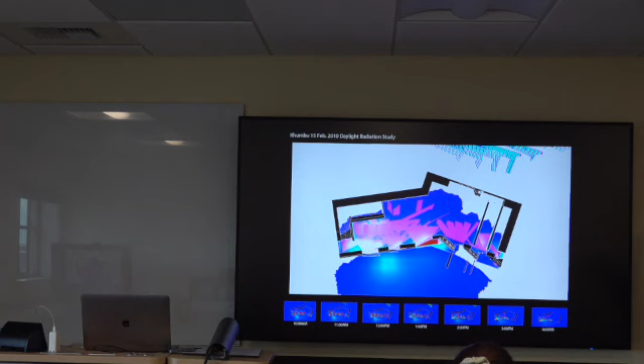So we modeled the building, and these are radiation studies. Especially at 12,500 feet, the air is incredibly thin and there's a lot of sun in the winter. We were able to orient and shape the volume of the building to maximize heat gain so it could be entirely passively heated, without having to burn yak dung in there at all.

It was kind of a funny story, a little tragic too. We were in Kathmandu trying to source it, and one supplier said, 'Oh yeah, I can do insulating glass, not a problem, we'll manufacture it.' So he manufactured a bunch for this. When they were portering it up, around 8,000 or 9,000 feet, the windows started popping and breaking. That airspace in insulated windows usually has a wick to allow for pressure change, and this guy hadn't done that at all. So all the windows started breaking.

So we didn't end up paying for those, but if you ever go up there, you can still see broken pieces in some of those shops. We got another supplier to put that in. So not only could we get the heat, but once it was in, we could keep it by having an insulated building, which they hadn't had up there before.

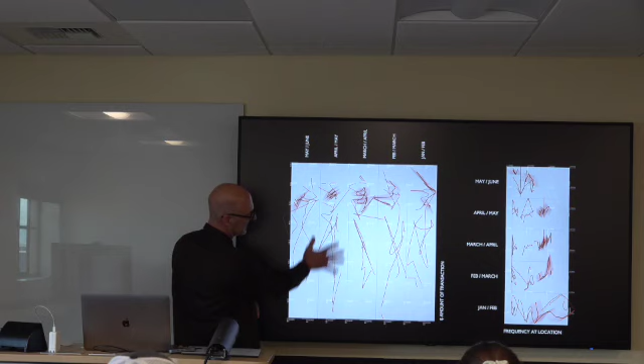So then it took these months and overlapped them. So January and February overlapped. And where they overlapped, the orange line that you see is their coincident space, right? So it doubles the probability, or it identifies the probability of when that would happen. And then looking at these abstract coincident lines here, I started to see two different patterns. One are these kind of long ones, and the other one is this kind of highlighted pattern.

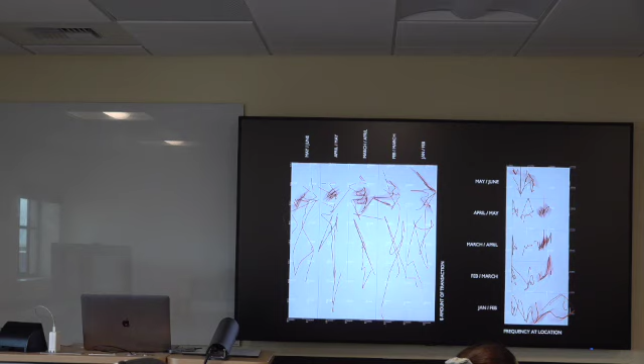So this is a narrative of how I lived in the city, one way of kind of mapping how. Like if you look at somebody who runs, two people might be running, but the way they run is very specific to who they are. And just the way that you live in a city, although people might go to the same type of places, the pattern of when and how they do it starts to be unique to them.

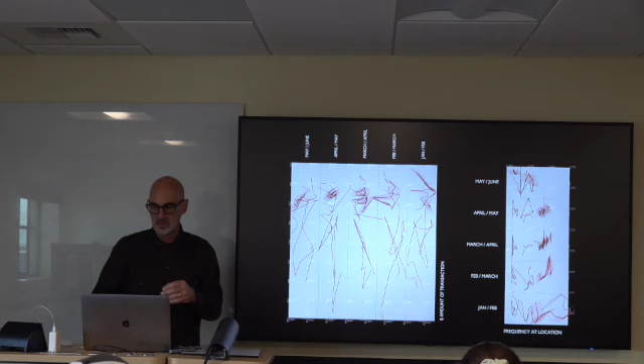And so, what would it be like to inhabit this space? One of the things in architecture, sometimes when we start design, is looking at precedents. Like if you're going to design a gym, well, I'm going to look at all the other gyms before me, see how they did it, use lessons learned on that. Another way to think about it is looking for allies, people that are maybe exploring some of the same concepts that you are and looking at how they have done it. And so it doesn't have to necessarily be a building.

So one of the allies that I looked at was scenes from Christopher Nolan's movie Memento. I don't know if you've seen it, but it's the story of this guy who experienced a very traumatic incident and he loses his memory. And so he's trying to investigate what happened, and as he finds clues, since he can't remember them, he tattoos them on his body.

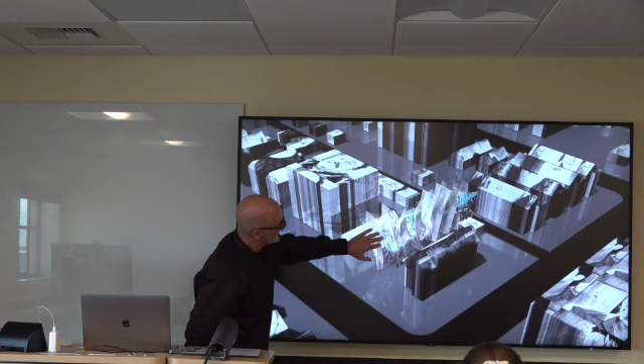And this is the space. Then this is the house in its neighborhood. Not sure it meets the zoning codes, but anyway, joke.

The third thing, so we talked about attitude and vocabulary, the third thing is tools of thought. The tools you use to design influence what the design is. Like for example, if you think about Twitter, people aren't saying anything they can say, they're using those words, 140 characters or whatever it is. Everything is limited to that, so that's partially determinant on what's said. You have to be dramatic, you have to do all these kinds of things. So the tool makes a difference.

So many times when you do designs, it's helpful to use multiple tools so you can get different perspective. The other thing is to stay liquid as long in the process as possible. What that means is stay flexible. Don't design one part of it and say, okay, that's done, let's move on. Design's not a linear process. Sometimes you might be doing something and become aware of something later in the process and want to change it. And then the third thing is constraints.

You'll hear this many times from architects: if I didn't have to meet the building codes, I could do this fantastic design. Oh, if the client didn't have this budget and I had more money, everybody could see my genius because I could design this fantastic thing. Those are constraints and those are part of the project. And instead of using them as a seemingly limited way of limiting your creativity, use them as ways to actually increase your creativity.

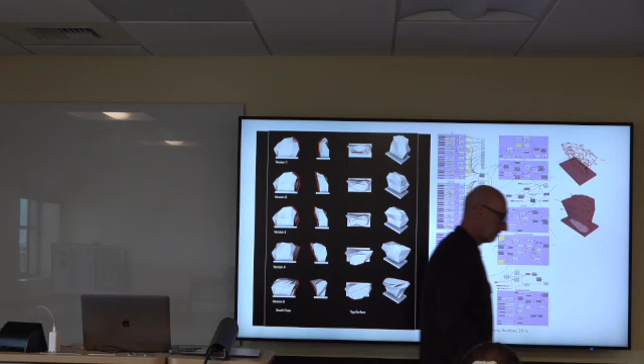This is a project we did a few years ago, a climbing boulder over by Yellowstone Hall here. The recreation director at the time came to us, and they had actually hired Stronghold Fabrication in town, who built the other boulders on the Gallagator Trail. They already had a budget for how much this thing cost, and they said, okay, you can't change that. The budget is the budget, and you can do whatever you want as long as you stay within that budget.

So we met with them and asked, well, what determines the budget? They said it's three things. One is the surface area of the boulder, because they spray it with concrete, so there's a specific cost to that - you can have any shape as long as the surface area is the same. The other thing, since there's a metal frame on the inside, is the length of steel you're using - you can't go beyond that because of the cost of material. And then the third thing was the number of joints, because every joint is welded and that costs money.

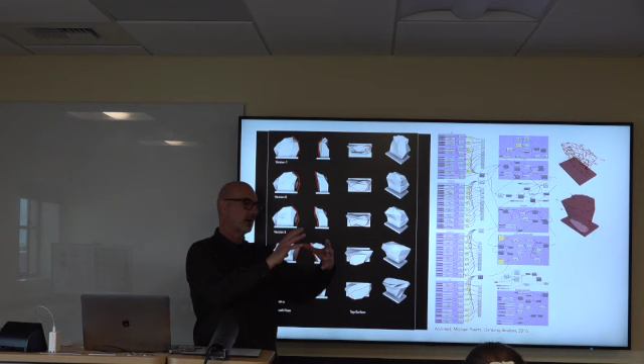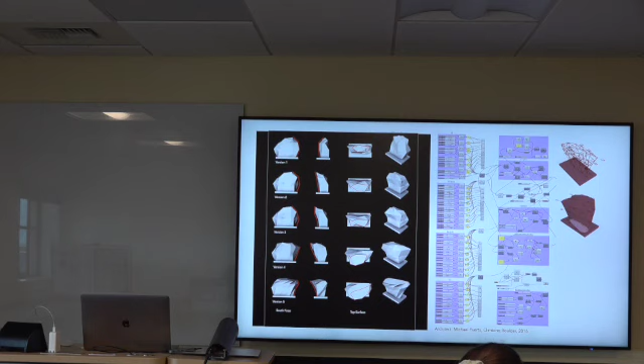So those three things - we created this script, which is just a Grasshopper script. In the script, we baked in those parameters: the surface area, the number of joints, and the length of steel. It had sliders you could move to change the shape of the boulder, but it always kept within those parameters. So any shape you came up with was automatically within budget, because that's what was determining the budget. We did a community workshop with that script where different climbers adjusted the shape of the boulder to see what they wanted.

We had Conrad Anker there, so you had like the pinnacle - he works for North Face, the opinion of an elite climber. We also had other people; one was actually an architect who graduated from our program, Neil Baggett, who was a climber in a wheelchair. What was interesting was when he was adjusting it, he said, because I don't have the use of my legs, I really prefer when the surface comes back like that, so I can concentrate on my arms and climb up. I said, well, that makes sense - so he's not dragging his legs over the surface. And other climbers with super abilities, like Conrad, also preferred that because it was more challenging.

So it was interesting that the same shape fit for both that kind of wide variance of abilities.

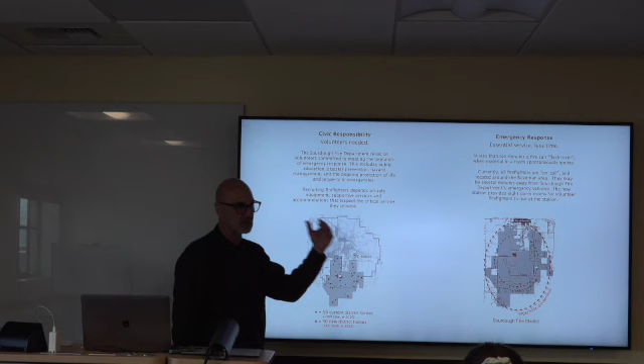So we started out with these diagrams. One showed that just south of town, in 10 years' time, the amount of structures was going to double. It's actually surpassed that.

The other was that they didn't have firefighter volunteers, who are actually mostly MSU students, living in the fire station. So they would be on call, get the call, have to drive to the fire station, get their gear on, and then go to the fire. This black circle is the radius they could achieve because of that time difference, and by having them live there, they could respond quicker.

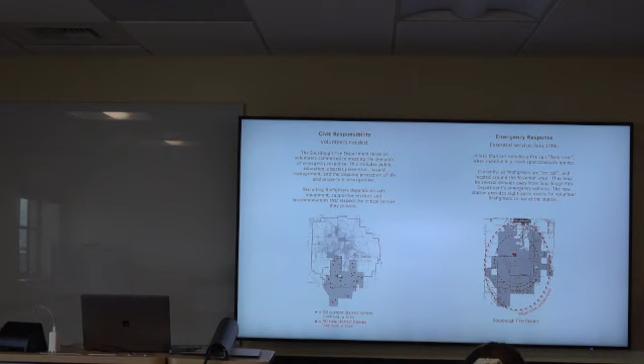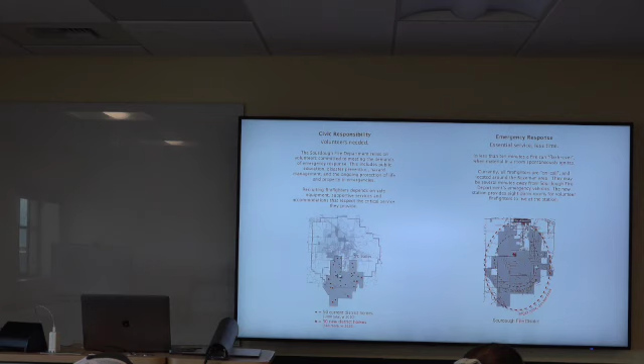You may not know this, but that first 10 minutes is the most critical. After a fire's been going for 10 minutes, things can reach what's called the flashover point, where it becomes so hot that things spontaneously combust. So it's critical to get there in that 10 minutes, and by having firefighter residents live there, it expanded the area they could cover and shortened their response time.

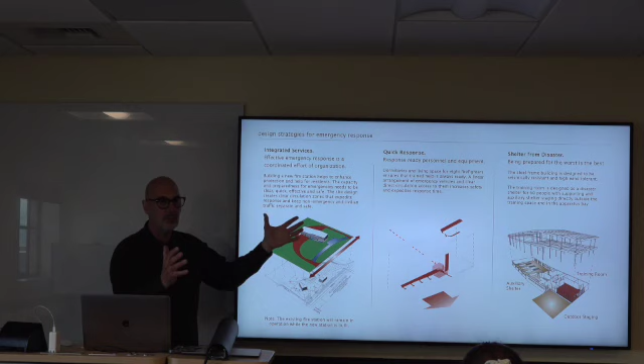So these three diagrams are with regards to emergency response. We also talked about the site, and of course we had to put a schematic design for a building in there, but it was more of a placeholder, because after the bond passed, they hired an architect to design the building according to these performance guidelines.

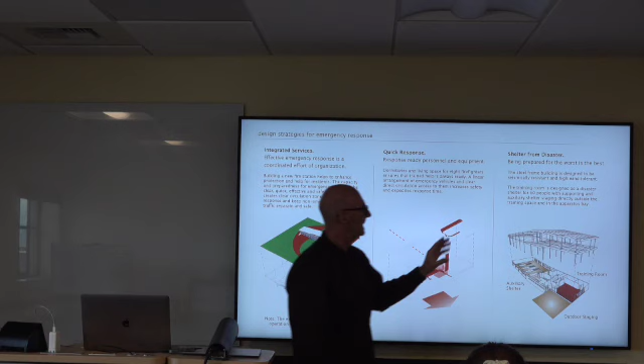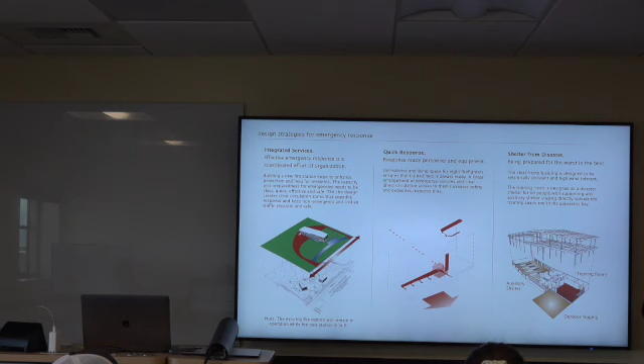So we talked about the site, the kind of circulation for getting fire trucks in and out fast. We talked about inside the building and having where they sleep close to the fire trucks for a quick exit. And then we talked about making a building that was earthquake resistant and high wind tolerant, so it could be used as emergency shelter for the community in times of need.

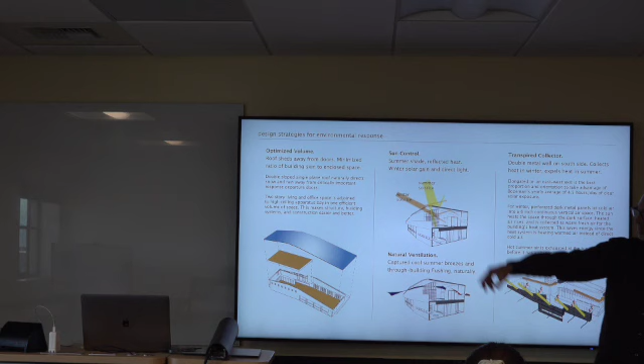Then we looked at it from an environmental standpoint and said the shape of the building needs to minimize the surface area for the maximum volume, because surface area is where you lose all your heat - it's an energy thing. Then we said it needs to be self-shading, get good sun in the wintertime, and have natural ventilation for air conditioning.

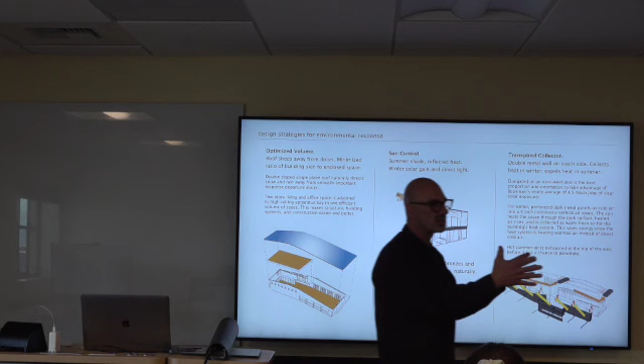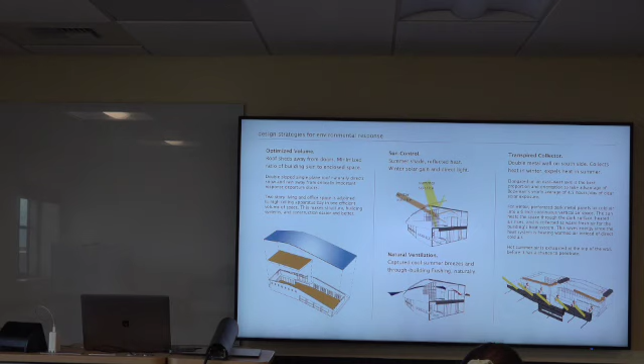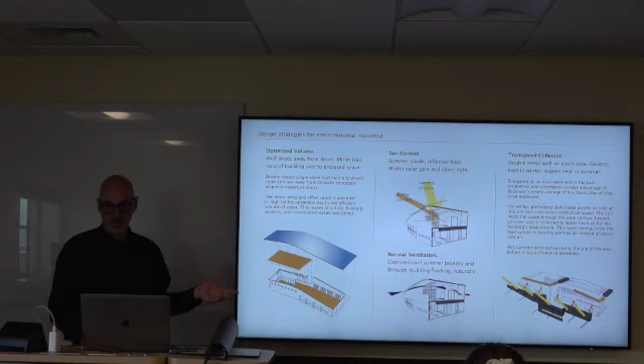And then we advocated for a transpired collector, basically an airspace on the south side, so that when the building heats in winter, you're not taking in negative 20-degree cold air and heating it to 65. This passively warms the air, so you're just taking air from like 45 degrees to 65, using a lot less energy. The bond overwhelmingly passed, they hired an architect, and had it built.

Next project is one we've been working on for a few years on the Fort Peck Indian Reservation. The Fort Peck buffalo were eliminated about 130 years ago from the eastern plains of Montana. For the Assiniboine and Sioux tribes, the buffalo is a foundational part of their culture.

So they've brought back buffalo, and there are more than this, but two basic kinds. One has cattle genes in them, which they raise for meat. The other are buffalo like you see in Yellowstone, which are pure DNA, the same exact buffalo that used to roam all across eastern Montana.

They currently have a herd of about 500 buffalo on roughly 15,000 acres. It's been growing, and they're doing a fantastic job of bringing it back. They wanted their culture to be able to experience the buffalo again.

Our charge was, and actually students came up with this idea themselves. One idea they came to us with was to create a pasture for buffalo closer to the highway. But that felt a little gimmicky. So students came up with the idea of a path you'd walk through the buffalo ranch, where you'd be able to experience the buffalo in some way.

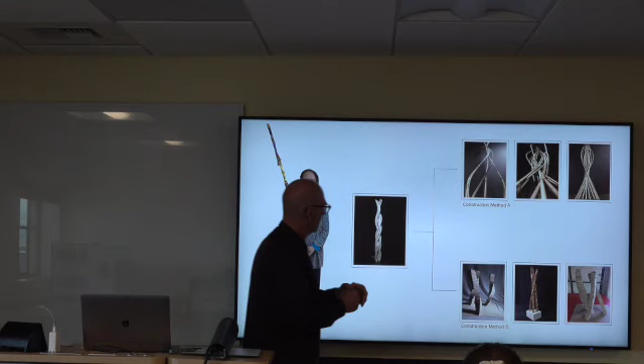So we took that idea and said, what if these were bigger—like 11 feet tall? What could they possibly be? This is a woven willow, or diamond willow. You take the smaller willow trees as they grow, and they get a disease and grow around that diseased portion, come back, get diseased again, and so on. If you cut a diseased piece of willow, you see these diamond patterns caused by that—that's the diamond willow, and that's what they usually use for these talking sticks.

So we took that inspiration of the woven willow and created this structure, this pole that had several strands.

We had a review with high school students, and we were pretty proud of some of these designs. We asked the high school students, what do you think, what's your input? And they said, what do they do? We said, what do you mean, what do they do? They're beautiful, these poles. They said, yeah, but it seems like they should do something. That made perfect sense—they probably should—so we went back to the drawing board.

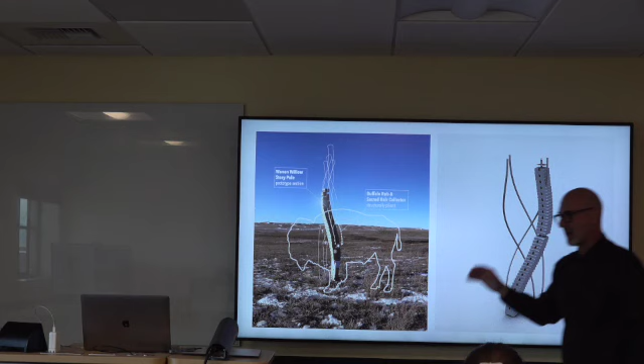The way we conceived these different poles is based on how buffalo love to rub on things, and their hair is culturally significant and considered sacred. Native Americans often gather buffalo hair and weave it into different things. So this is part of a prototype we put out there—the idea is a buffalo rubs against it, which has a metal frame inside with pucks stacked on it that snap into place. When the buffalo pushes against it, those pieces open up a little and grab their hair, so they can scratch an itch—a benefit to the buffalo—and it collects the hair, letting people experience buffalo in an expanded way.

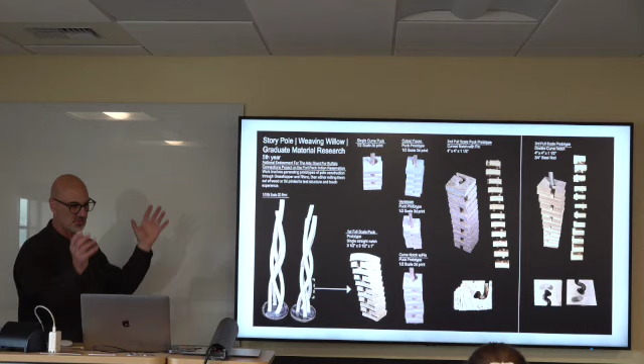We used prototypes a lot—these are all tests we did for different types of pucks we could use. What we actually came up with to make those pucks out of is Corian, the solid surfacing material used in kitchens for countertops. When they cut out sinks, they throw that material out, which is what this all is. We found a bunch of these offcuts and used them to cut out all the Corian pieces for the whole thing, upcycling the Corian for the pole.

Another thing as far as tools—Daryl Growingfender, an artist in Poplar, Montana, worked with us on these workshops. Initially we were going to paint the pole, but that probably wasn't such a good idea since it would wear outdoors.

So as part of that process, students developed these stencils. After this, we actually went to 4 different high schools on the Fort Peck Indian Reservation. There are like 101 different stencils that incorporate into the pole. But that came out as a result of doing this.

So we decided, instead of painting it, to CNC into the side of these pucks the different stencils. This is a thunderbird, and these are some of the more poles. There are 4 strands that go up, and these are some of the ones from the different high school students. So jumping between these different tools gave different insights for design.

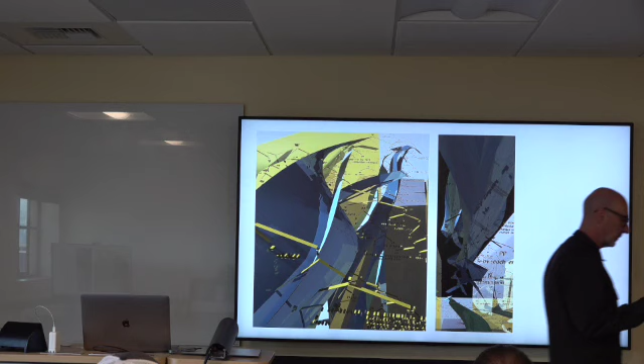And it was kind of interesting because I worked for Valerio in Chicago at that time, and I didn't tell them that I was doing this competition, I did it on myself. And that night, after the jury had decided the winners, I get a call from my boss, Valerio. It's like, Mike, we just finished jurying this stuff. And I'm not supposed to tell you, so keep it to yourself, but you were one of the winners. I said, wow, that's fantastic, I really appreciate it.

He goes, yeah, I didn't know you were entering because it was anonymous, you didn't know who's judging. I wasn't a big fan of yours, I didn't vote for it. And one of the reasons is if you were a winner, you had to build a physical model, and he said, I don't know how the hell you're going to build a physical model on that whatever.

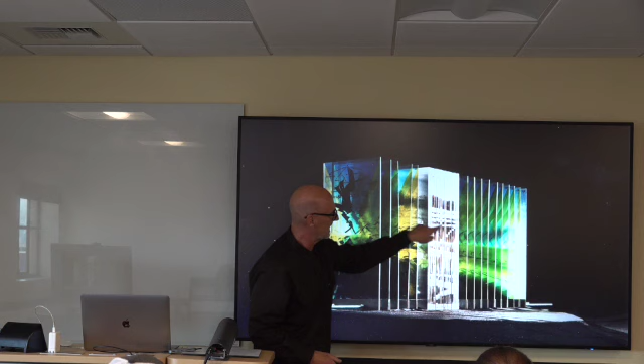So this was a physical model. It was basically just plexiglass, kind of animated. This was solid plexi here that I cut the ribbons, as they went through. Anyway, but it was a way of critiquing design and thinking of design as a broader process.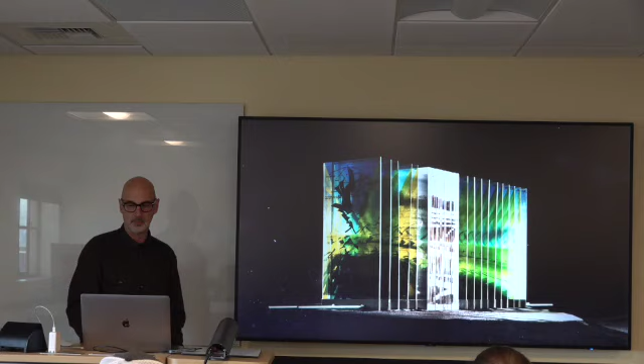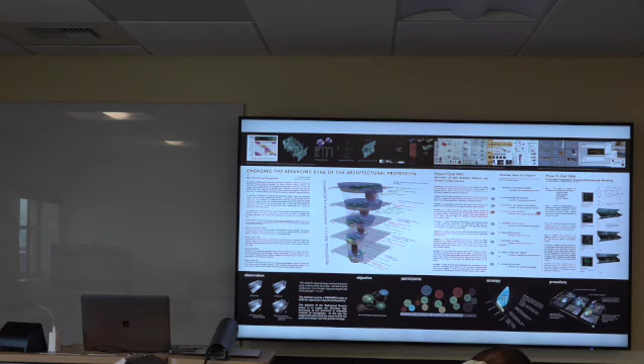The last couple of projects that I'm going to show are related to curriculum design. So all these different majors that you guys mentioned you're taking, your professors are designers. They're taking your requirements for whatever majors, and they're designing assignments, designing tests, designing the curriculum for you to learn in the best possible way. They're critiquing their own design of the course and coming back and changing it. That's a fruitful way to think of things if you think of curriculum as a design thing.

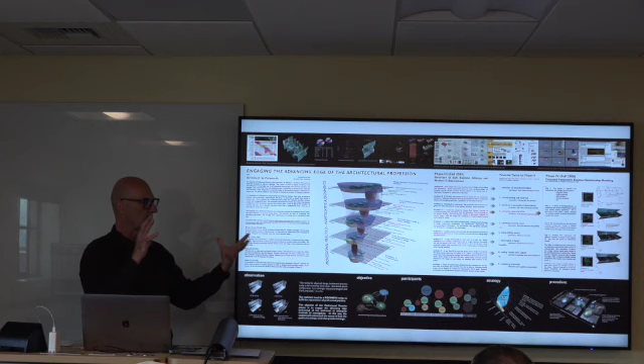This was design. I also teach professional practice, and this was actually a national competition that we had won. The gist of it was that architects needed to know more and more, and they were designing more things. By the time you were presented knowledge and understood it in a test, when you got out to practice, the field was changing so much that maybe you were behind a little bit.

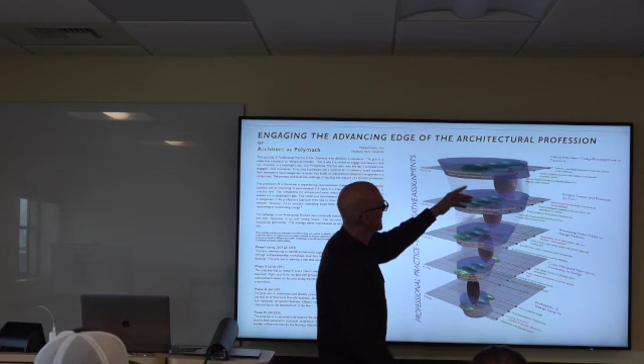So what this proposed is that student projects would be integrated with students doing projects the year before, and also to integrate more local architects with hands-on assignments. The other part was this idea of the architect as a polymath, meaning you need to know more and more. So as the curriculum advanced through different stages, more things were taught. There's a little more to it, but it's more the idea that you design curriculum.

So this is the last thing, just to reiterate a couple of points I've covered: it's important to shift the mindset—design as a noun to design as a verb, a process. Hopefully by extending it and thinking about it that way, it opens up more possibilities. The second thing is craft, fabrication, engineering, technical projects—entrepreneurs are probably one of the best examples of a designer. They take an idea, a business model, and create space for that to be realized. Amazing.